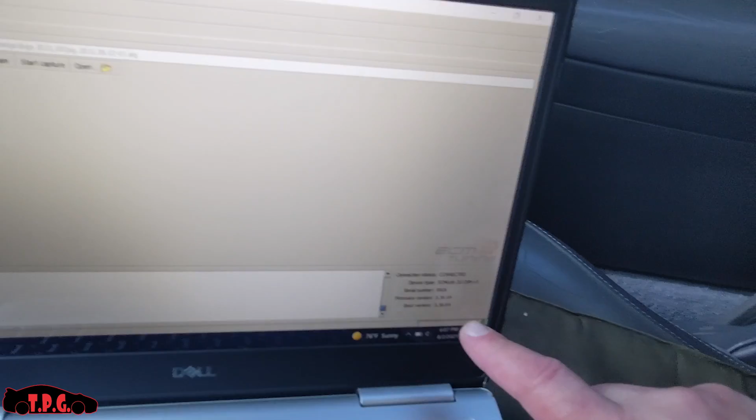Let me get a better angle at this. This is gonna be tough, it's a tiny car and I'm a big guy. Let's go down in here and take a look.

If you look down in the bottom right corner, we are on version 3.36.64, and that's the version you guys want to have installed, which is the latest firmware for ECMLINK.

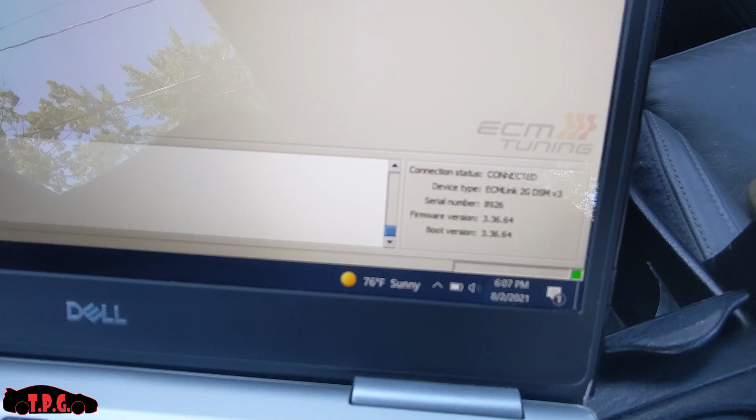Now that we're upgraded, we are going to connect. The first thing you got to do is click the connect button. It's going to run through its little paces down here at the bottom, checking all the sensors that it has, and it's going to say connected. The bottom left says COM7 connected, ECMLINK in 2G DSM V3.

Up at the top, you can start a stream, start a capture, or open a previous data log. When you install ECMLINK, it puts all these file folders in your computer system so you can go back through and access data logs, which is a huge tool.

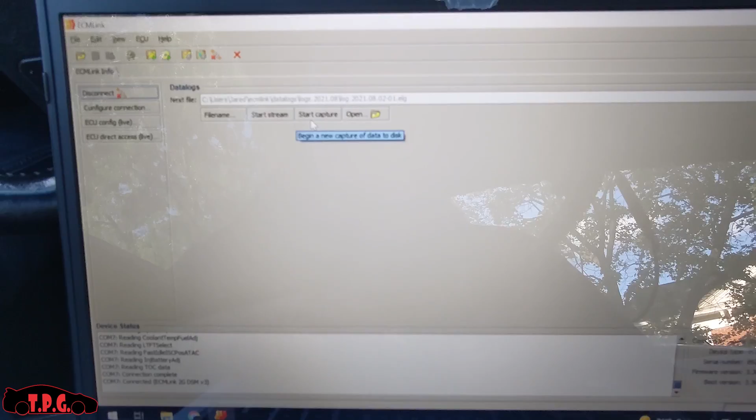The first thing you can do here is click on Start Stream. Stream is just going to show you live data of everything you've put down in your log screen - all the different fuel trims, combined, ISC position, airflow speed, AEM wideband, anything you want to click on and log is on this screen.

So we're going to pretend that we plugged in for the first time and we have different fuel injectors hooked up and we have to get this car started.

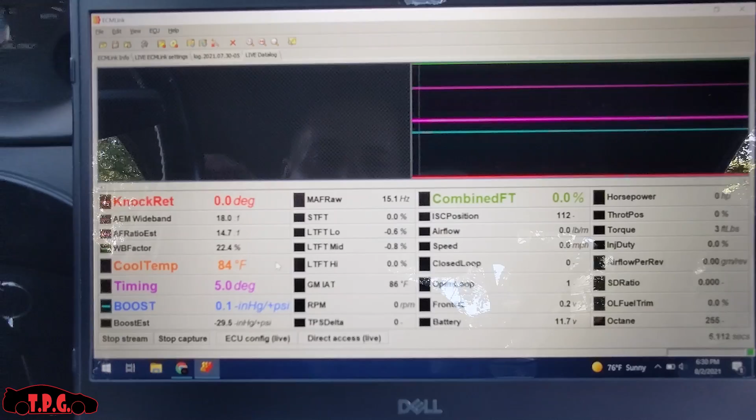Once you've got everything plugged in and your firmware updated, the first thing you're going to want to do is check out your stream. You're going to hop in here and just see what kind of information you have being logged. This is the number one question I get all the time: how do I set up my log screen to look like yours? Well, it's pretty easy - you see all these things at the bottom?

There's two ways you can do it. You can right click on it and come down to displayed values, and everything in this left column here, you can go all the way up and down it - there's about 100 different things you can go through. All you do is click one of them and click add to display, and it's going to bring it from the available values column over to the to be displayed column. Once you do that, it's going to pop up down here at the bottom, and you can get all these different parameters added.

You can go into raw values and get your MAF Hertz raw, which is a very important one if you're a MAF tuning person. If you have a MAF sensor hooked up - GM 3-inch, a stock one, an Evo, a 1G, whatever you got - that's how you do it.

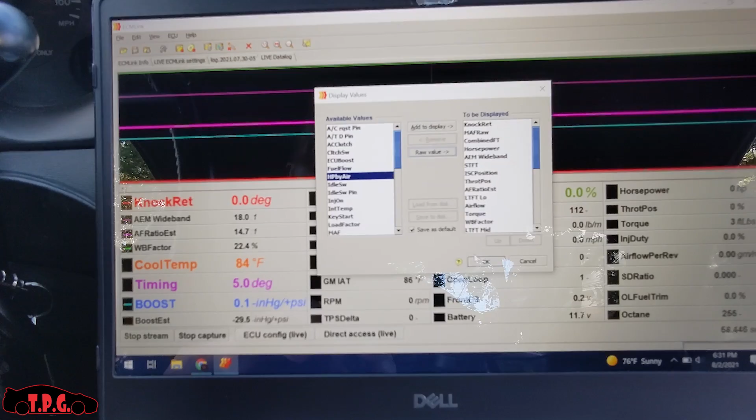Once you're done, you hit OK, and it will pop up on this display right here, and you'll have all these different parameters. You can reorganize them however you'd like. To reorganize them, if you want to stack them on top or have it all across the top line, you have to move it around with the up and down button that are in this pop-up box.

If you want to move the AF ratio estimate all the way to the top, where right here I have knock retard as my number one, I would just click on it and click up a bunch of times till it's all the way at the top.

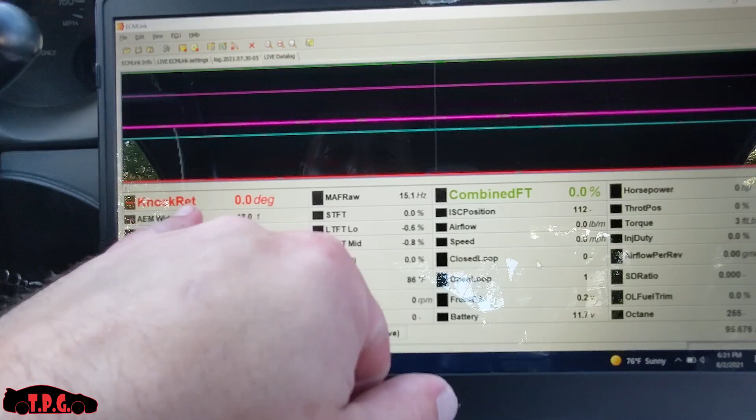Everything is set up in landscape, so each box is numbered: 1, 2, 3, 4, then spot number 5, 6, 7, and 8. So if I want knock retard followed by AEM wideband below it, in that pop-up window I put knock retard as number 1, AEM wideband as number 5, and so on down the list. I have mine stacked vertically—that's just how I like it. If you like it some other way, change it up.

Alright, so you stop your stream. If you don't see what you want in that log screen, go back into ECU Config Live, click on that, and come all the way down to the bottom of the page to ECU Inputs. That tab is where, if you're changing a sensor—like I swapped out my MAP sensor on the manifold and installed my OmniPower 3-bar map sensor in its place so I can log boost—this is where I tell the ECU what sensor I wired and where. I chose the MDP location and clicked on it.

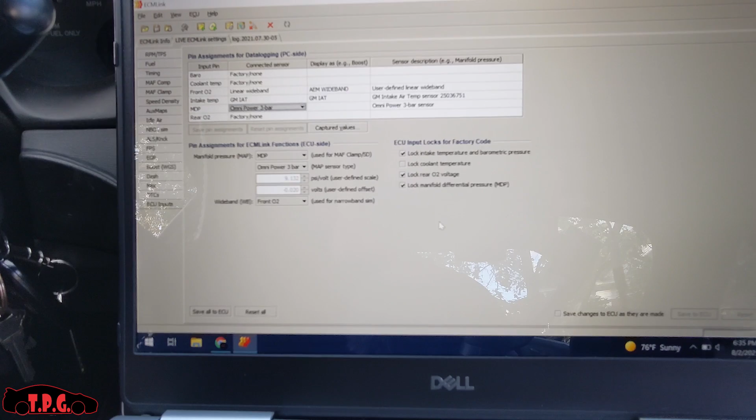A drop-down box popped out, and I chose the OmniPower 3-bar map sensor, went to the bottom right and clicked save, and now my ECU knows that the MAP sensor location is now an OmniPower 3-bar map sensor. So I can run speed density with my GM IAT, which is also installed and wired in. If you guys have the ECMLink breakout harness for the MAF sensor, it works great for wiring in speed density, or you can have both set up like I do. I'm still learning speed density and getting that set up.

So anyways, back to what we were talking about. If there's a value you don't see on your log screen and you want to add it, in the ECU Inputs tab you'll see this box right here that says captured values. You can click on this, and it's similar to your log screen—it'll show a column of everything you can add to your screen and log, and everything already in the system to be logged.

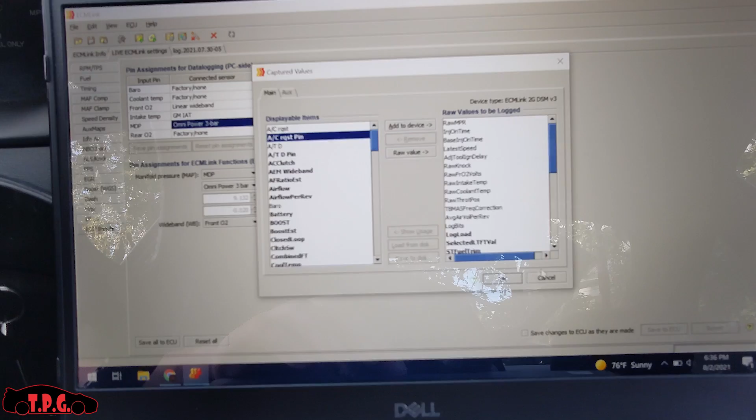You can scroll through this whole list. There's another sub-list of raw values you can go through, and all you have to do is click the device or item, add to device, and hit OK. Once you're done, come back into your log screen, right click on it, click captured values at the bottom of the pop-up, and that new item you added should be in there someplace. You just have to look—it's all in alphabetical order.

Something else really important to remember: during the first start or first capture, the first log that you make, consider that your backup. So anything you mess with from this point on—you already have one started and one stopped log, stream, or capture, whatever you want to call it. You'll have one file saved from initially plugging in and checking out your log screen. That's going to have basically all your information for your ECU.

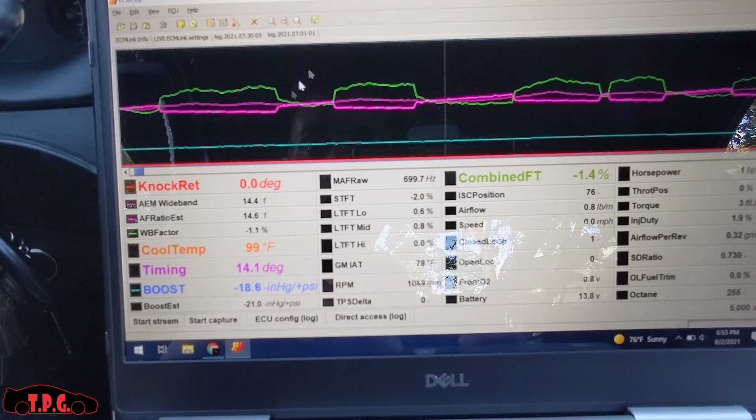If you go in and start messing with anything at all, you can always revert back, because you can come back to this page, go to open, and go to that very first log you made, double click on it, and when it pops open, it has all the information in your ECU before you messed with it any further, saved. So all the stock stuff is saved and you can revert back. There's some stuff on the ECMLink page you can download if you mess with your timing table and want to go back—they have timing tables, fuel maps, a bunch of stuff on there. So I like to have my very first log saved as my first log, so if I ever need to revert back, it's kind of like a restore point in Windows, for lack of better words.

If you mess up something and you don't like it and can't remember what you changed, you can always go right back and save the first log you ever made, so everything's stock, fresh, and unadulterated. Now that we've got that out of the way and know how to set up our log screen, we are going to try to start the car.

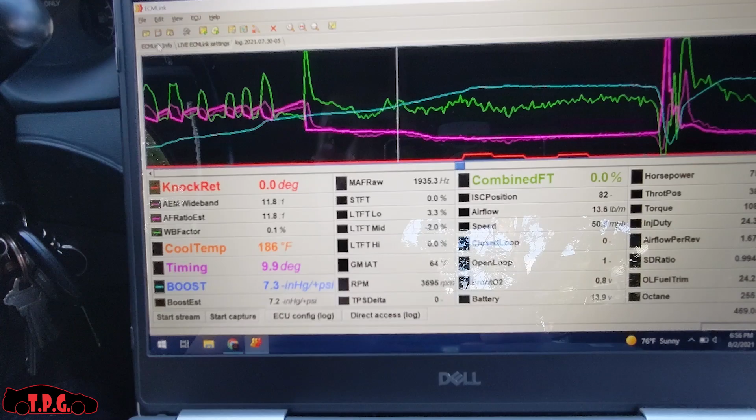In my case, we ended up putting in some 750cc fuel injectors. With those fuel injectors, you can't just swap them out and start your car. That's not going to work, because the ECU thinks it has 450s in it, so it won't give you enough gas, or it'll give you too much, and your car will run like crap if it even starts. It'll stall out and spit and sputter, and it's just a bad time. So we're going to want to get that squared away.

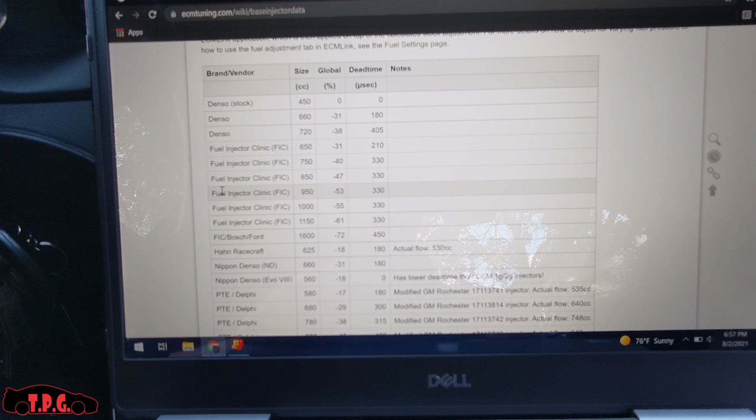First thing you do, before you fire your car up, is connect, put the key in the on position, connect, and go to ECU Config Live. Since we're using 750cc fuel injectors, we're going to jump into the fuel tab. Now you'll see this graph, another plot chart similar to your MAF comp, but we're not going to mess with these sliders at all. Instead, we're going to hop back over to ecmtuning.com/wiki/base injector data. This table is a compilation of a bunch of different injector brands, types, and sizes, and it gives you important information so you can get your car fired up.

Alright, hopefully you guys can still hear me. The car is on now. So we're going to pretend we just started this thing up with a set of 750cc fuel injectors, which, if we go back to our table, are fuel injector clinic 750s. So we had to go change the global to -40 and the dead time to 330, per the ECMLINK wiki.

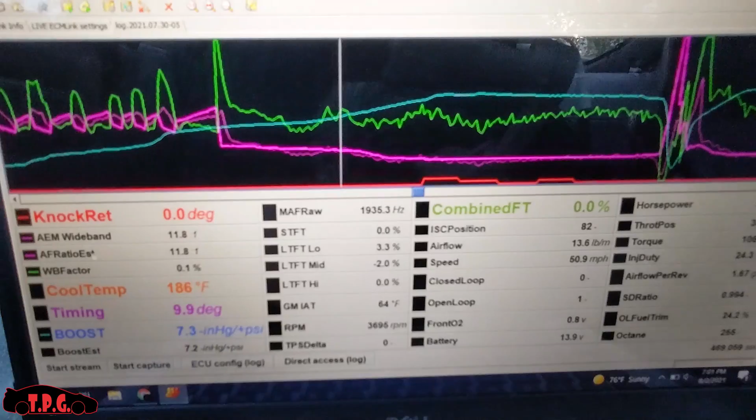That's what the ECMLINK wiki says. If we come over here and take a look, you can see I'm at -40, and it goes to -40.6, which is what ECMLINK automatically put in as the decimal place. I do have a different dead time, a little bit higher than what they suggested. They want 330, and I'm up a little bit. I'll explain that to you.

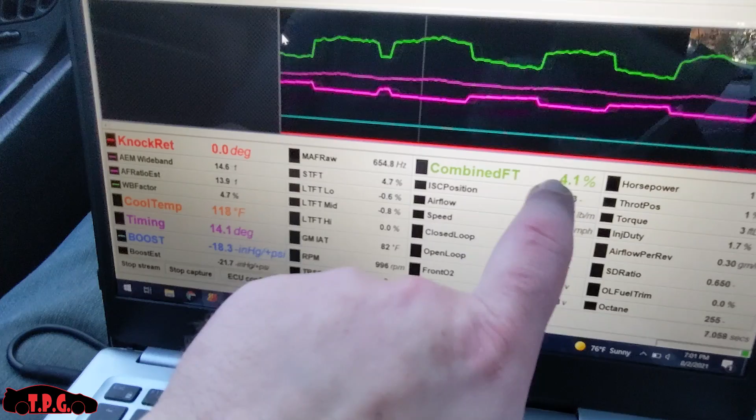We started the car just now, so we're going to start a capture so I can give you guys more information. If you look at this capture data, you'll see we just started and our combined fuel trim is showing lean, 3 to 5%, fluctuating between 3 and 6 actually. We have our LTFT low, LTFT mid, LTFT high, and our short-term fuel trim right here. These are some important numbers you want to log.

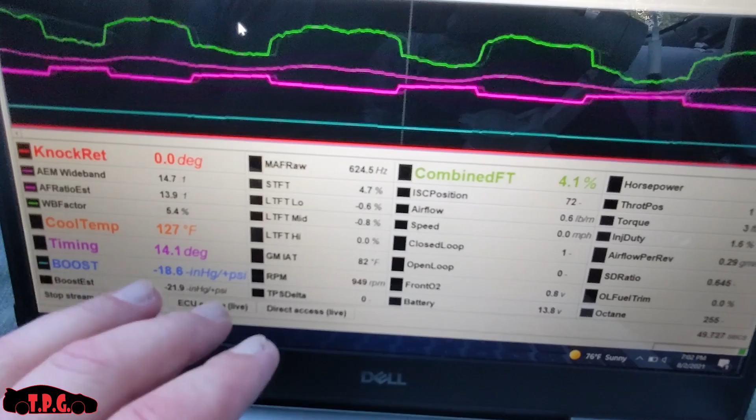When the car is fired up, first thing, we're going to take a look at this number and our wideband factor. These numbers will fluctuate when the car is cold, it's at 124 degrees. Once it gets up to operating temp, the combined fuel trim and wideband factor should settle down a lot. So you don't want to make crazy drastic changes until you get some temp in the car and it levels out. Once it warms up, these numbers will get a lot closer to 0, which you want, and then you can make your adjustments.

But for the sake of argument, let's go ahead and show you. If you start your car and this number's way out, say it's at minus 15%, meaning you're running 15% rich. Well, we log MAF raw so we can see that our idle hertz point, how much airflow is coming in, is in the 6 to 700 range. So our idle point over here in our ECMLINK live settings, if we go back into MAF comp, we know that on this chart the car is idling between 600 and 700 hertz.

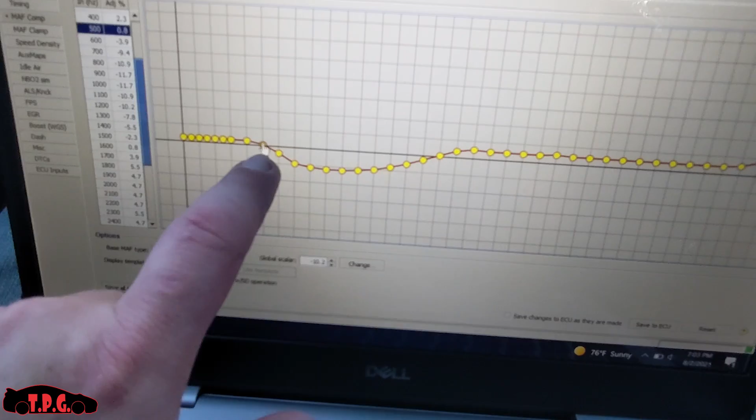That's these two points right here. So if I have a ton of fuel and it's saying I'm 15% rich, it says minus 15% back here, meaning it's pulling 15% of fuel out, I'm running really rich. I'm going to look at MAF raw and see I'm at idle, between 5 and 600 hertz, then go back to my ECMLINK live settings, go to the 500 hertz point, and pull out 15% until I'm right about there, and do the same at 600, then save it.

Now, if this is where I'm idling, 5 and 6, then these other points really don't matter too much, so I would just go over here and bring all the rest of them down so that they're in the same area as my idle, because it's not really going to go any further.

If the car goes into stall, you don't want it really lean. Say you hit the gas funny or shift funny, you don't want the engine RPM to drop so low that when it hits that airflow point, it's either dumping a bunch of fuel and stalls itself out, or it chokes itself out by not giving it enough.

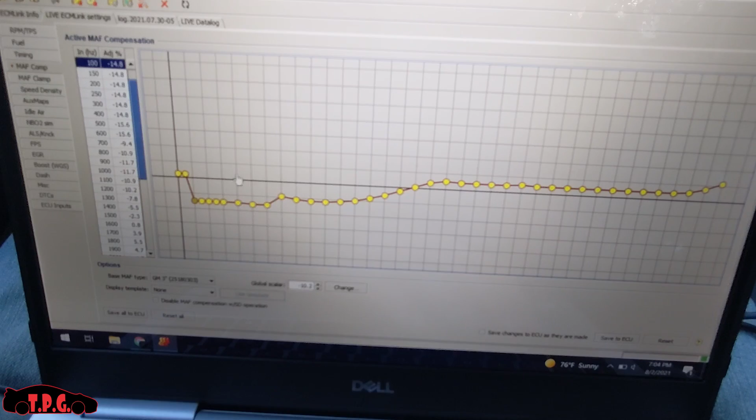So I usually put my idle hertz points and everything below that on the same level. So if I was 15% rich and I moved my 5 and 6 down minus 15, I would bring the other ones below that point down also, and that's going to be the start of my table. So now I have everything below 500 and 600 lined up together.

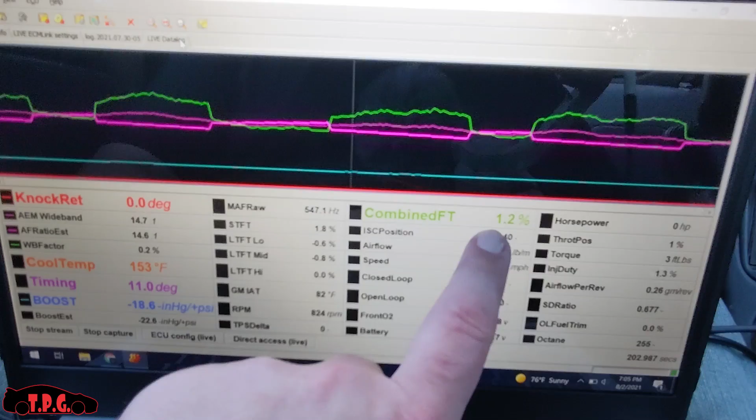Now I'm going to go back in, after I save this, go back over to my data log and take a look and see if this combined fuel trim number has dropped at all. If it's gone from minus 15 to minus 1 or 2 and gotten a little closer to 0, I'll be happy.

Now, in the reverse, if this number here says it's 15% lean, if it doesn't show minus 15, it just shows 15 on here, and my wideband factor is showing 15%, I'm going to come over here and do the opposite.

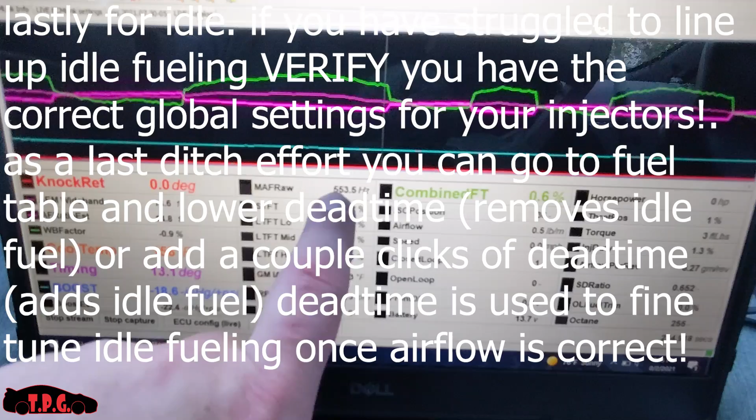I'm going to grab my idle hertz point. It's still the same — if I look at my data log, I'm still between 5 and 600 hertz idle airflow hertz. So I'd go back into my settings, and wherever the 500 and 600 hertz points are, I'd go ahead and add 15%, and then bring everything below 5 and 600 up. So we're going to make those all the same.

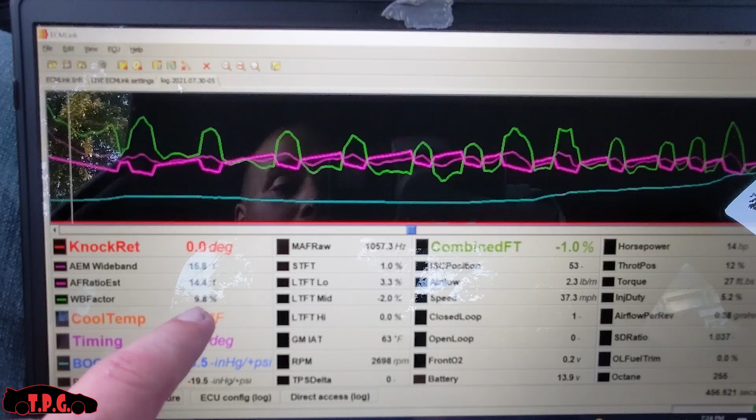So now we've messed around, we've got the car to fire up, we've got our idle hertz figured out, our airflow points are at 5 and 600 hertz with a 3-inch GM MAF sensor. If you're running a stock MAF, it's going to be around 50 hertz, that'll be your idle point, but we figured out how to line up our fuel trims at idle so the car is not saying we're running 15% rich or 15% lean.

And we don't have a huge wideband factor correction, and it's idling and sounds fine. We're going to take it for a light drive around the block — no boost, don't rip on it, I'm talking a grandma drive, part throttle around the block, just to get a log, just to get some information so we can start making changes as needed.

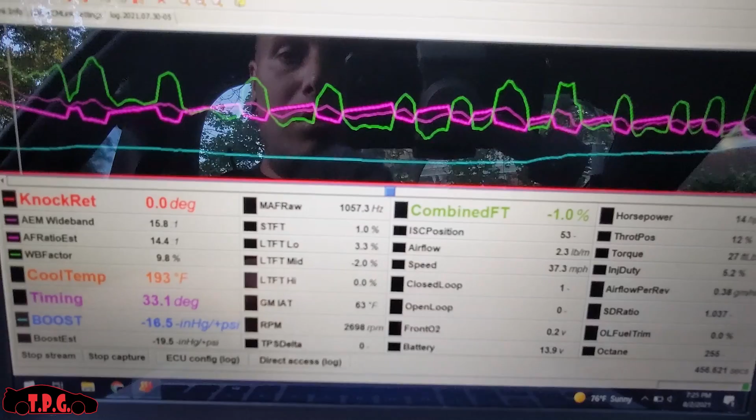So we went around the block and came back, we shut the car off, and we're going to take a look at the data. First thing, we're going to look at our MAF raw point. Right here we are at 1000 hertz, and at that point, which we also know corresponds to our MAF comp table, 1000 hertz is right here, that little dot.

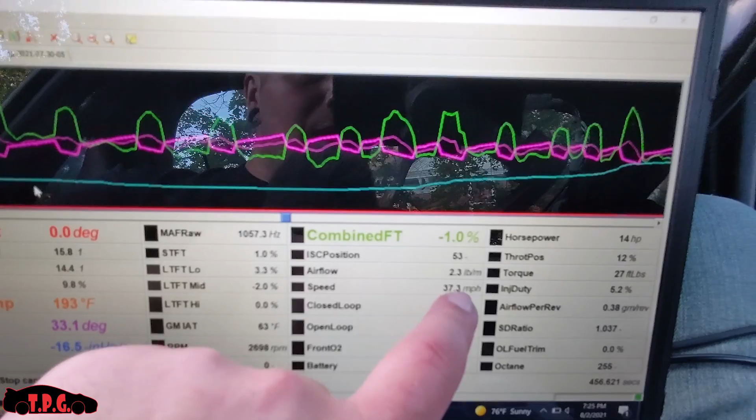Now at that point, ECMLINK, if we look down here at our wideband factor, it says that at 1000 hertz, just driving around at 37 miles an hour with 12% throttle, nice and slow, it's saying that we need 9.8% fuel correction. So what we'll do is go back into our MAF comp setting, and at 1000 we're going to add 9.8%, and we're going to leave it there.

Now we're going to go to the next hertz point, which after 1000 would be 1100. So we're just going to keep going forward until we see an 1100 pop up. Right here's 1100 hertz, and it's saying that we need to add 10% fuel.

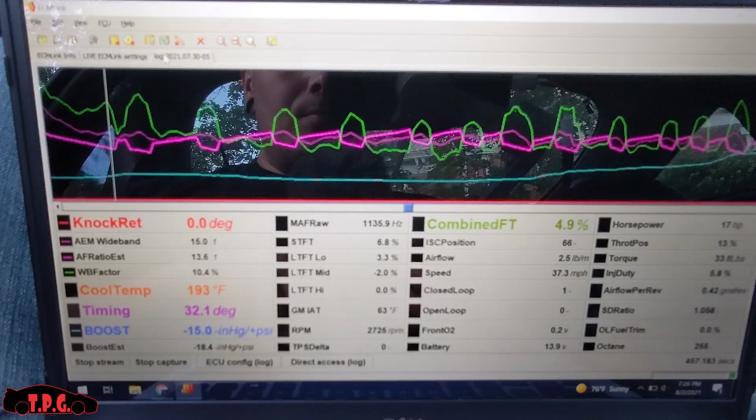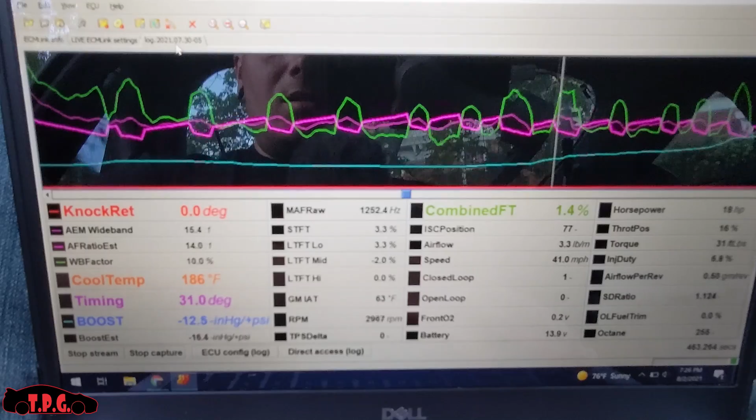So we'll go back into our settings, go to the next point, and add our 10%. We're going to keep doing this all the way through—1000, 1100, 1200, 1300, 1400—and just keep going through the list until we get to the highest hertz point that we just logged. We'll call it 1800 hertz, and we're going to look down at our wideband factor and our combined fuel trim, and try to get these within plus or minus 5%.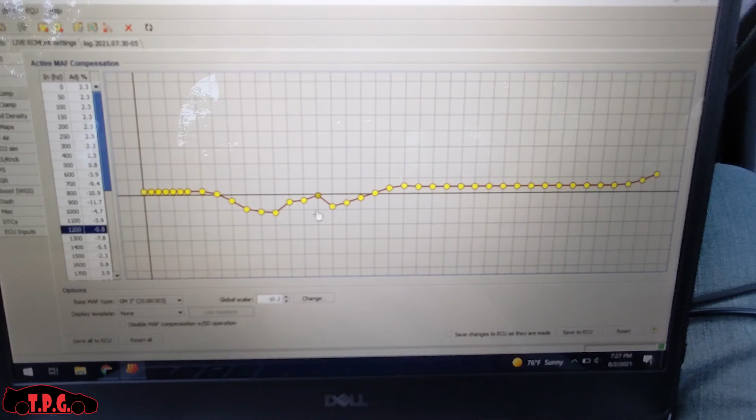So we're going to go back in here and add the couple of percent we need to correct what our wideband factor says. And when we're done, we're going to have a bunch of different points on our graph, and it may look something similar to this.

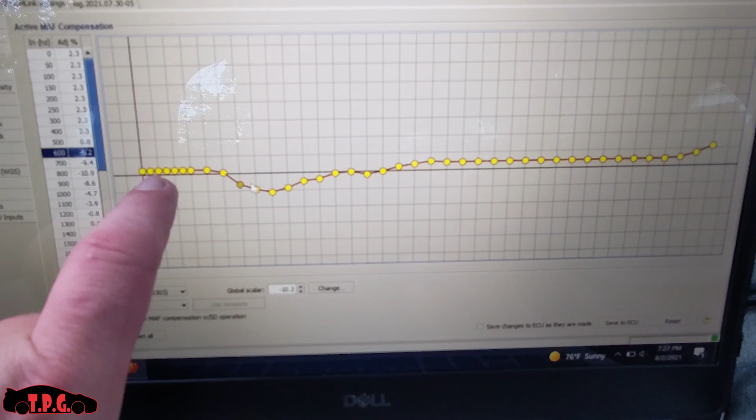If you end up with this wavy, all over the place, somewhat jagged looking graph, you're going to want to go back through and smooth this out just a little bit, because you want this to be a nice, smooth airflow chart. You don't want it going crazy where after your idle is all nice, you've got a point that goes way up like that or way down like this. You want a nice, smooth airflow chart or airflow graph.

So you can go through and tinker with it just a little bit. We're going to lower one right here, drop this one down just a tad, and this one a tad, and raise this one up some, within 1 or 2%. And then we end up with this nice, smooth transition here. Now that's where we're going to save it.

And we're going to go back out again and take another log, keeping an eye on our knock. We're not going to get into a bunch of boost yet. We're going to see if this next log has less correction on our wideband factor at each of these hertz points. So I'm going to check the 1500 hertz point again after I've just made my corrections.

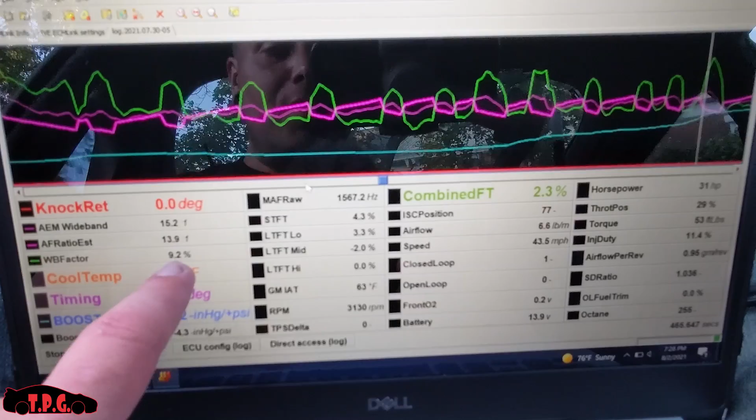I drove around and made another log. I'm going to go check this second log, and look at 1500 hertz. Hopefully I'm seeing closer to 0 or 5%—I want plus or minus 5%.

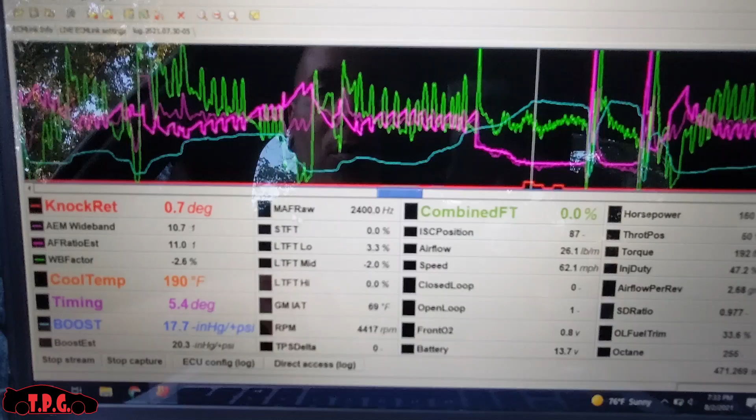One more thing I want to mention. If you're going through the paces, dialing in your airflow calculations and getting everything nice and calibrated for your MAF sensor, and going through the hertz points, and you end up stopping after your light cruise—we'll say in this case we stopped right here at this point. The furthest log I've got is 1800 hertz. I haven't gone higher than that yet, and I haven't gotten into any boost yet. You can see the rest of your graph drops off dramatically and is way down here.

You don't want that, because that's going to be a lean spot. When you raise one of these, you're adding fuel; when you lower one of these, you're taking fuel away. So it's probably not going to be very good for your engine if all this is dialed in all the way up to the 1800 hertz point, and you're driving 45 miles an hour down the road, you hit 5 psi of boost, and then all of a sudden all your fuel disappears for the higher hertz points. You're going to be lean.

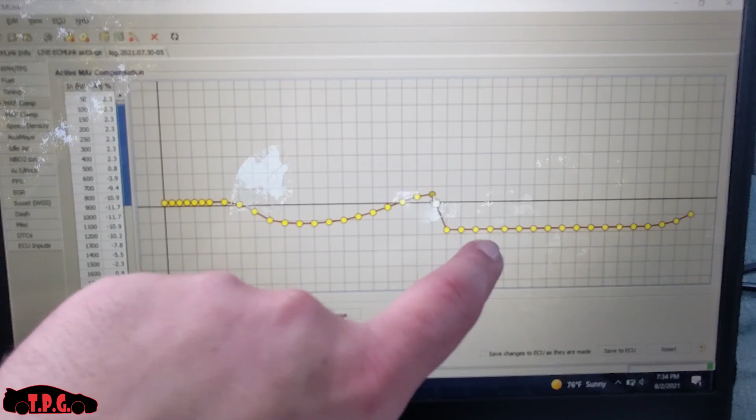You don't want that. So what you're going to want to do, until you get up into these numbers—until you get past 1800 hertz in a log, carefully, obviously you're not going to try to blow anything up—you'll want to go down here, and you can actually highlight all these numbers that are above 1800 hertz. So we can double tap and drag all the way down to the bottom of the graph.

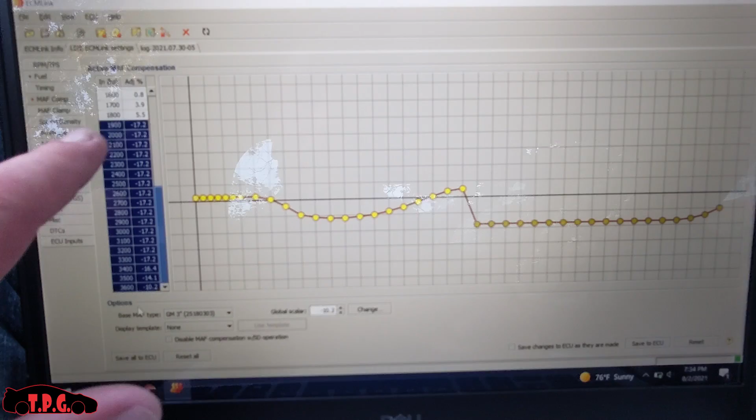So from 1900 to 3600 hertz, hit control then up arrow, and you're going to bring all this up to the 1800 hertz point, and that's where you're going to leave it until you start to log those higher hertz points, 18, 19, 20, 2100 hertz. You're going to want to at least have the same amount of fuel that 1800 hertz likes.

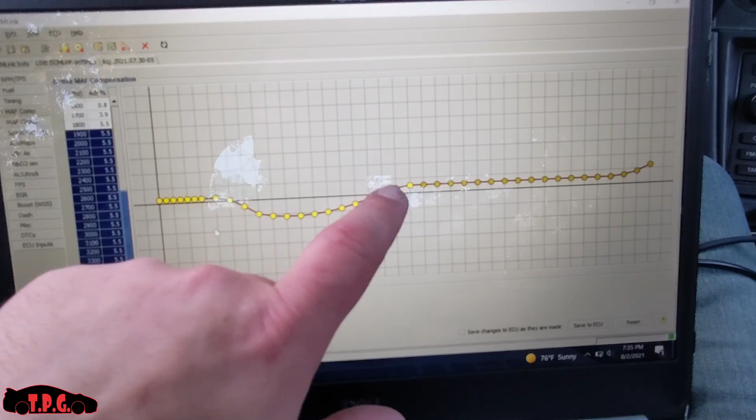So you'll save that to ECU. Then when you go in and do your third log and everything looks good in the lower hertz points, and you're on part throttle cruising and nothing's going nuts, you're not having a whole bunch of correction, you're not getting a bunch of knock, you can start to give it a little bit more throttle and start getting into these medium hertz points, which would be in the lower boost range.

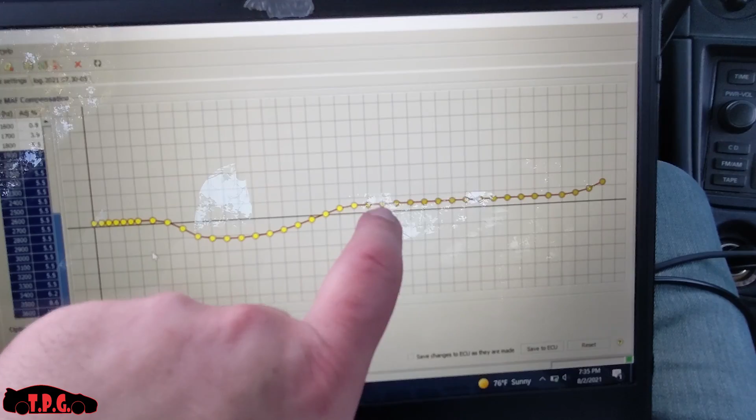If you're running wastegate pressure 12 psi, you can keep an eye on that, and make sure you're not knocking like crazy and add fuel accordingly. Once you get up into 19, 20, 21, 22, 2300 hertz in your logs, you can make the corrections that you need to make like we did in the lower ones and make all the changes to these numbers as necessary. But you don't want to have them really low so it's just a drop off and you lose a bunch of fuel.

So now that you've done your short drives around town and you've gotten up to city limits, you can't go faster than 30, 40 miles an hour, you're going to have to take this bad boy out on the highway and start doing some more tuning at some higher speeds.

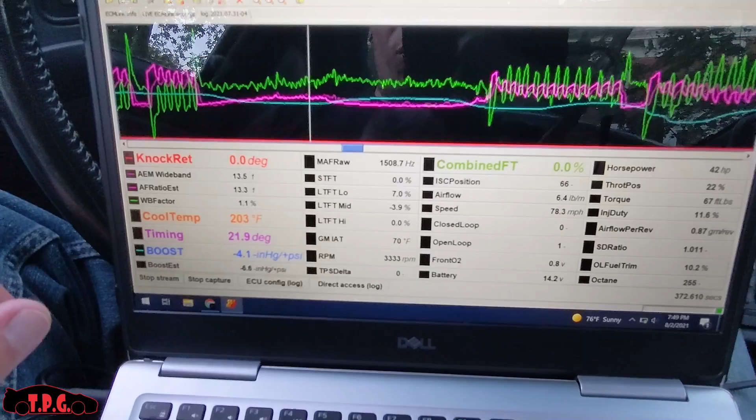So we're not going to get into a bunch of boost yet. Let me close that out. We're just going to go jump on our local highway or county road and take it up to 50 to 70 miles an hour. Be gentle. Don't go ripping through the gears. Don't hit a bunch of boost yet. Hopefully you have your boost turned down. And you're going to try to stay out of boost and just go jump on the highway.

What you're going to look for is that you have no knock, you have little to no correction, and your wideband factor is right around plus or minus 5%. In this case, we're driving down the highway and we're doing 77 miles an hour, going with a 0% correction, and we're only off 0.6%.

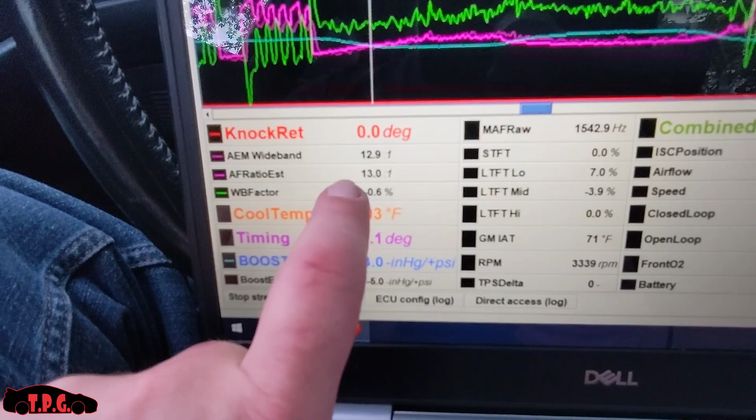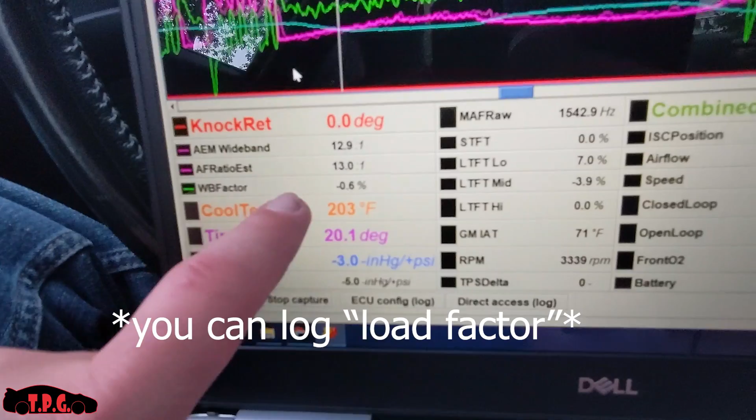So AF ratio estimate is the number that is pulled from your direct access table. If you are curious where this number comes from, this is the number that the ECU has programmed into it, off your fuel table in direct access. So at this point of the RPM band at 3,300 RPMs at the load factor we're at, which is a loggable value, you can log load factor, it says that it should be at 13.0 to 1 AFR, and you're just on the edge of it.

Things are good, so you're going to do a log. You're going to make sure that your wideband and your air-fuel ratio estimates are overlapping on your graph. That's what you want. Keep an eye on your wideband factor. Drive it around down the highway. Put a little bit of load on the car, and make sure that your numbers line up.

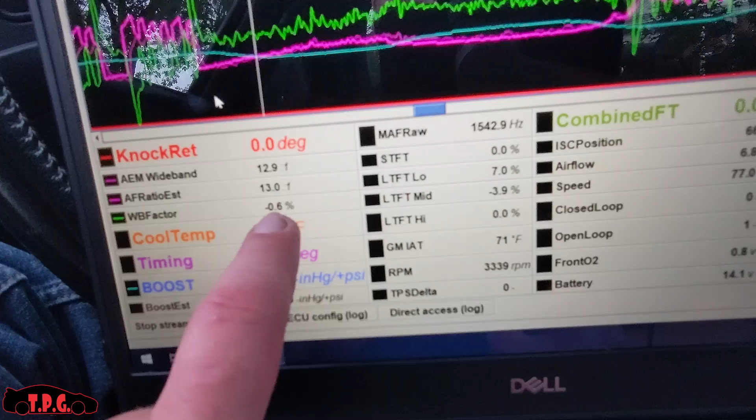So if they don't, you're going to do the same thing that you did before to correct your idle. You're going to figure out what hertz point you're at, what correction wideband factor says, and you're going to go into your MAF comp table and make adjustments accordingly.

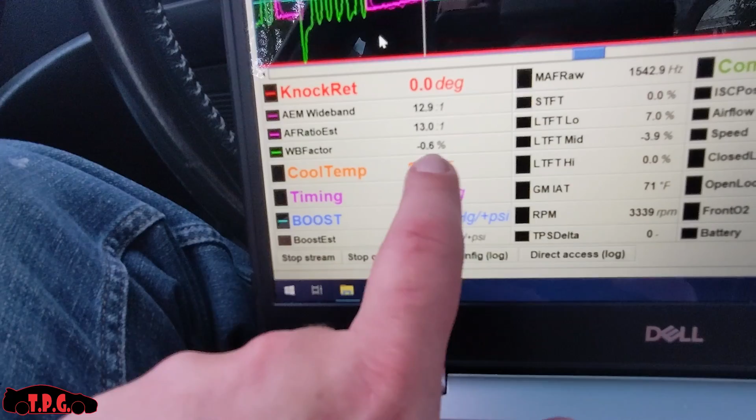So right here at 1500 hertz going with wideband factor, it says we're at minus 0.6, so it's taking away 0.6% of the fuel at that hertz, which is good. We're within plus or minus 5%, so we're going to leave it there.

Okay, we got her fired back up. Now you've done your log one, you got your idle set up, you did a second log driving around town, dialing in your fuel, you did it again, got the higher hertz points figured all out, and you went for a nice highway drive, and you're all dialed in, and things are good.

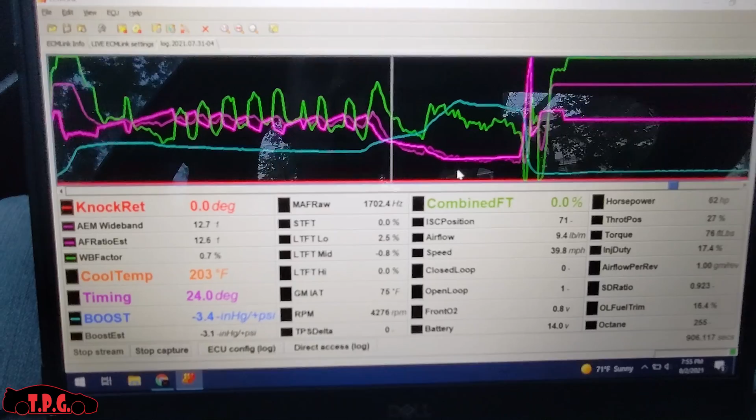Your fueling looks correct, you're not way off anywhere, so now you can start creeping into a little bit of boost and just doing some light pulls. And you're going to keep an eye on your logs, and make sure that your lines are close to overlapping with your air-fuel ratio estimates and your wideband. You want them to be right over top of each other in the logs.

So this blue line is boost. My red line on the bottom that's flat is knock. We have 0 degrees of knock.

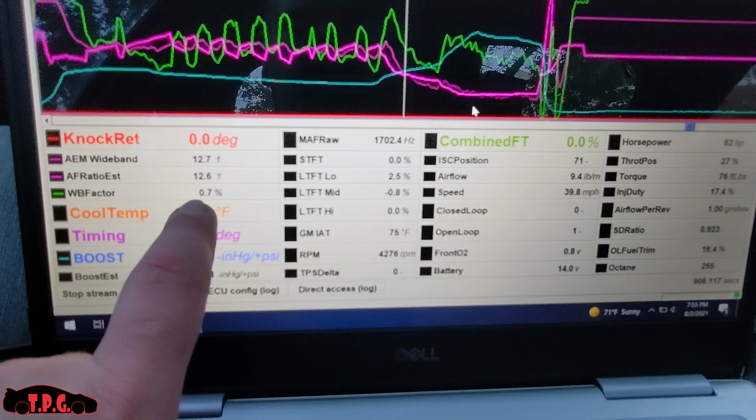We're a little bit lean right here on this point, 0.7%, and I don't have any correction. Things are looking okay, so in this case I went out and did a little pull.

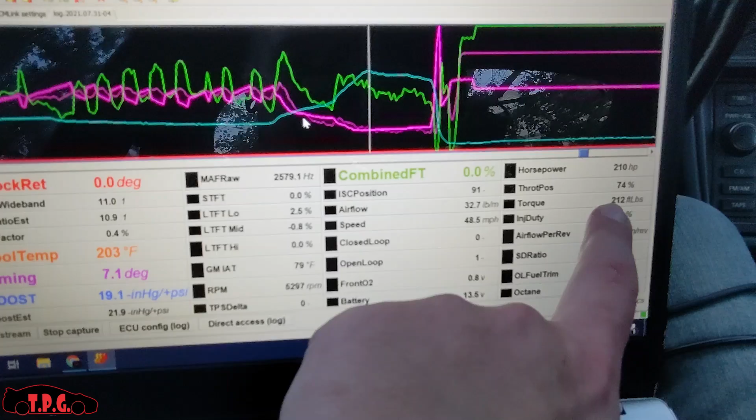You can see in the bottom left here it'll show us boost. We went up to 19, looks like 19.1 pounds. At 19.1 psi we didn't get any knock. We were at 74% throttle, so we weren't quite maxed out, but everything looks okay.

No knock. The AFR is 0.1% off, which is fine. We don't have a crazy wideband factor correction going on. We're not overheating. We didn't have a whole lot of timing there, but the main thing is we don't have knock, and we don't have a lot of correction here.

So as you continue to go on and dial things in, you're going to get your hertz points all figured out. This is 2,579 hertz.

So in ECMLINK under MAF comp, we're way up here at this point in our chart. We're at the 2,500 hertz point. You can see that going from 18 to 25, there's not a whole lot of correction going on here.

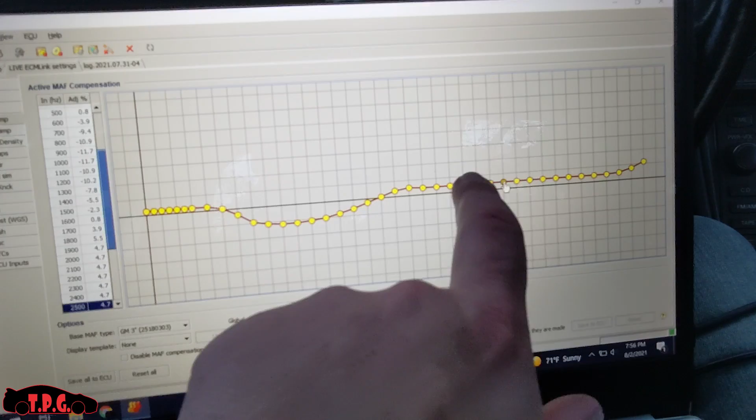I didn't have to change a lot of stuff. It's relatively smooth, and that's a good thing. I'm obviously going to have to continue to tune this and mess around and dial these numbers in as perfectly as possible. And then we have a nice calibrated MAF sensor, we have correct fueling, and you're having a little bit of fun in your car finally.

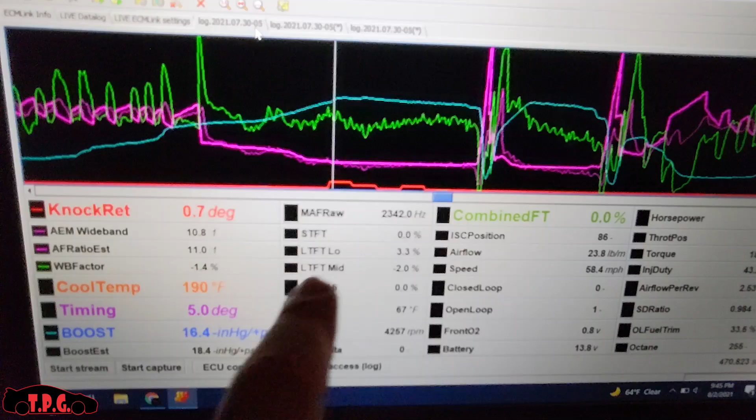There's something else I wanted to touch on before we wrap this up. You can see right here, for example, we have 0.7 degrees knock. So say your graph looks like this and you have correct fuel and your airflow is all dialed in perfectly and you still can't get rid of the knock. This is a small amount of knock, 0.4, 0.7. Anything under a degree is pretty small in my opinion, but you always want to tune for zero.

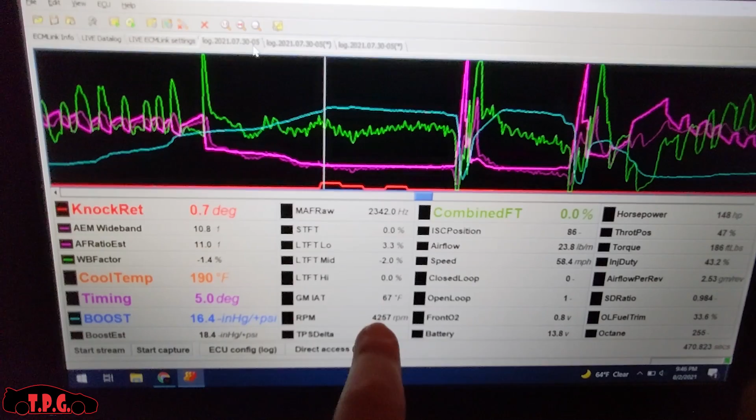So if something like this is still hanging on and you can't get rid of it, or say you get a crazy amount of knock, like 5 degrees of knock right at this point at 4,200 RPMs, you're getting that at 15 pounds of boost, well chances are you might be running too much timing. Here we're only at 5 degrees timing advance in the beginning of this part, but maybe you're running 18 degrees, and you have to figure out where exactly to take some timing out.

There are two different ways you can do this. Again, if your fuel curves are nice, you don't have a bunch of correction on your wideband factor, and your combined fuel trims are all nice, you can go in and remove a degree of timing. The first way to do this doesn't involve you shutting the car down and going into direct access, finding the cells and all that.

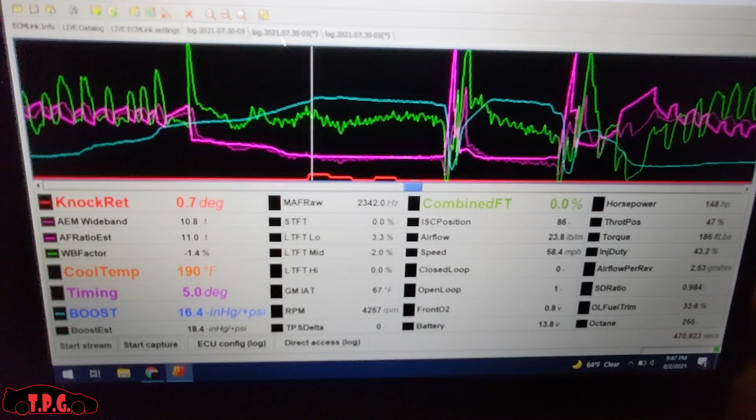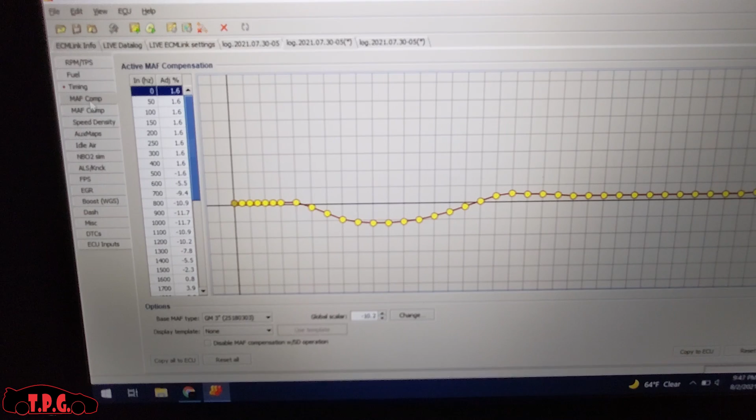You can actually use this first method if you want to just change it on the fly and see if it fixes your problem. If so, then later you can go in and change your direct access logs. So you can come over to the timing table, which is underneath the fuel and just above MAF comp, and you'll see the same style graph we had in MAF comp earlier, this graph right here. It's something similar, but this is for timing, showing you all the different RPMs from 2,000 all the way up to 10,000.

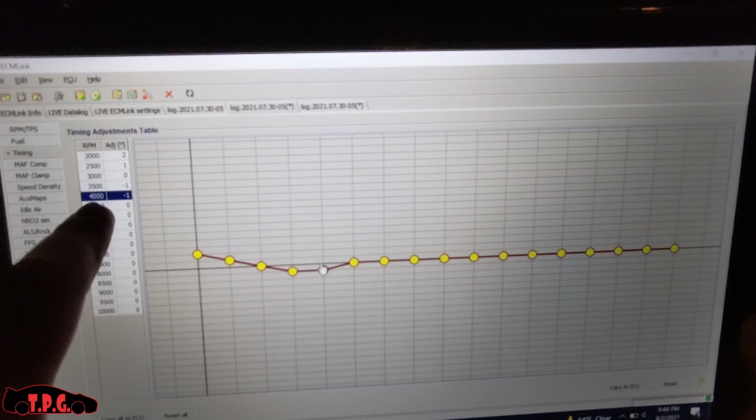So what you have to do is figure out in your log at what RPM you're getting knock. In this case it's at 4,200 RPMs, we're getting 0.7 degrees. So if we want to try and remedy this real quick, we can come into the 4,000 RPM slider, which it highlights here, this point right here. And if you hit Control and the down arrow, you're going to remove 1 degree of timing from the entire 4,000 RPM range. I'll show you what I mean by entire.

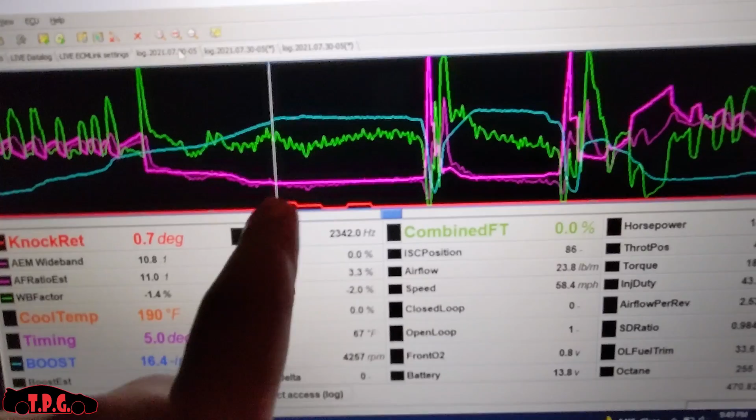And that works for every single one of these rows here in this table under timing, under Live ECMLink settings. So if you want to see if you can remove this 1 degree of timing from 4,200 RPMs or 4,000 RPMs, you come in here, click 4,000, hit Control and the down arrow, or you can just click and drag it wherever you want.

So we just removed a degree of timing from the whole 4,000 RPM band. Now we're going to go for a drive, and if the knock is gone, we know that pulling a degree out fixes it. So next time you're sitting around and you want to mess with it and get really in depth, this is a solution right here.

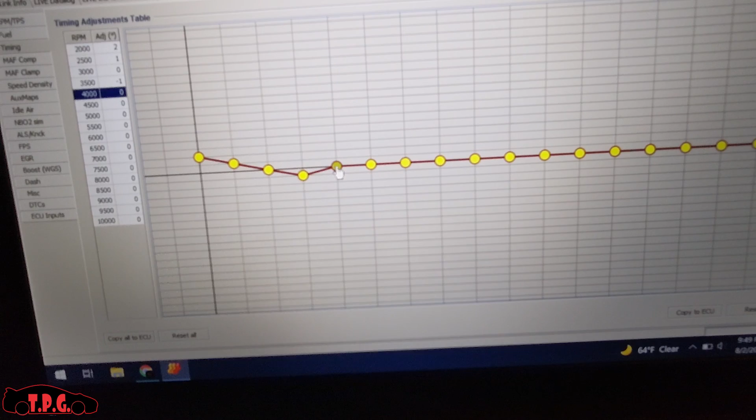But if you want to fine tune it, you can add that degree back. You can go back into your log and open up the direct access timing table, click track data log in the top right, detach the table, and then in the top left click always on top, shrink this down a little bit so we can work with it, and we're going to keep it in the middle of the 4,000 area in the center of the screen.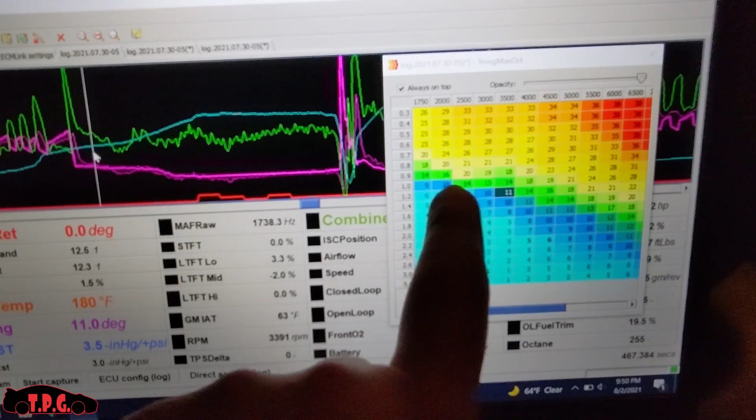We're going to go back over to our log, and if you click in the beginning of this little pull here, you'll see that this number is going to change as the RPMs and the load changes. It should drop down and move around, and that's where it's pulling its timing figure from. So the number you see down here should be the same as the number you see right here, unless you get knock, which once we scroll the log forward, you see how the numbers are changing.

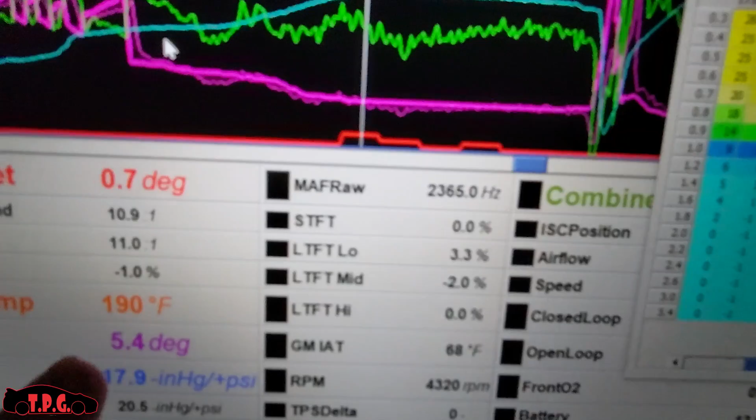Right here, it says we should be at 6 degrees of timing advance. But because we have 0.7 degrees of knock, we're only getting 5.4 degrees of timing advance. So here's where you can fine tune.

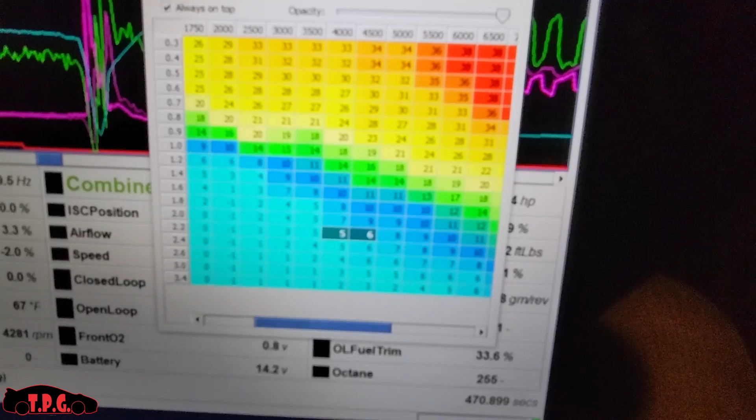If this point right here in this graph is where that knock starts, you can remove 1 from that cell by hitting control. We go to the spot where the knock starts, come back down here, click on this number 5 and hit control down, and then go to the cell next to it and hit control down. It will take 1 degree out.

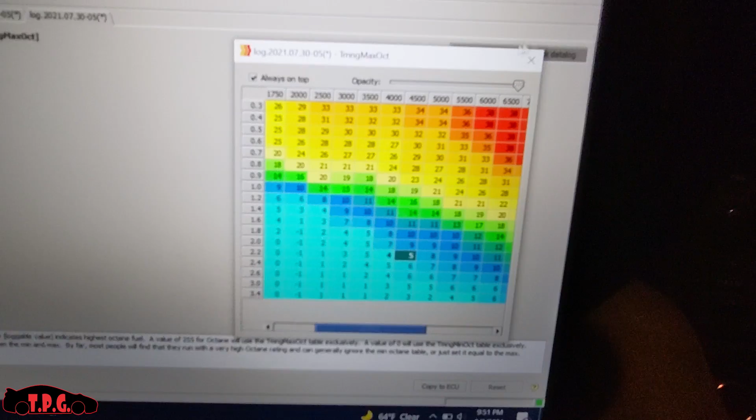Now you can flash this table back to the ECU, and if you build your table and need to do that, all you have to do is go back here, and under the direct access tab where you had the table detached, click detach table again, and you can see these darker cells. Let me move this out of the way. You can see all these are the same font except for that one right there.

4 and 5 degrees are a little bit more bold than the rest because they've been changed and haven't been saved. So now with the key on, engine off, you can hit copy all to ECU. You'll see your check engine light flash a few times, and this new table with that degree taken out at 4,000 and 5,000 RPMs, or 4,000 and 4,500 RPMs, will be flashed into the ECU, and now that should take away that knock that you were having.

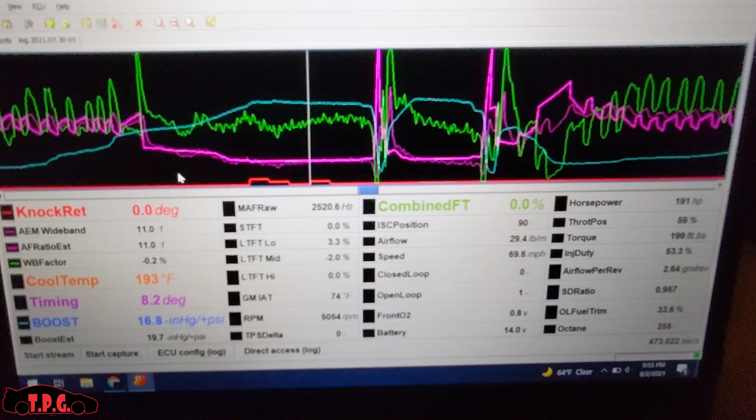There are definitely more people that are well versed with this program compared to myself. I'm still new at this and still learning, but this thing seems to be running okay, and hopefully this helps you guys get your cars set up and gets them running okay as well. Maybe now you know a little bit more what to look for.

If you set up your log screen so you can see this important information like the knock, your wideband is a must, your AFR ratio estimate. You want to see your wideband factor, your timing, your MAF raw, and your combined fuel trim. Those are some big ones that you definitely want to be logging for.

Hopefully this has helped you a little bit. Hopefully you can get your new injectors, or even the injectors that are just in the car that you bought, dialed back in and get your MAF calibrated.

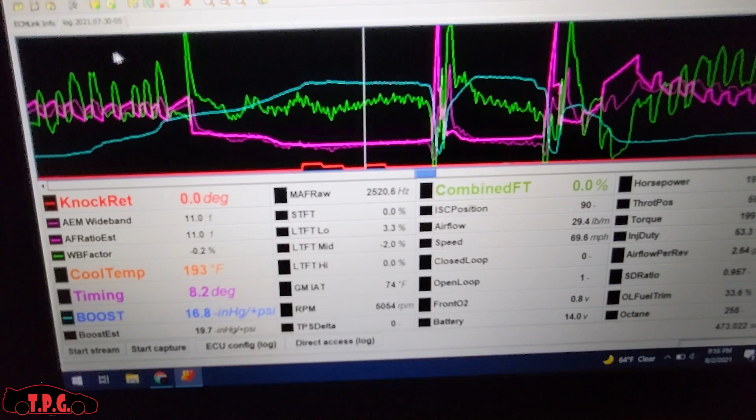I think we're going to continue this little mini series here and start doing some more information on speed density, and how to set up the speed density table, how to dial in your VE and switch over to speed density using a map sensor and an intake air temperature sensor, getting rid of the MAF altogether. I'm almost there, getting there slowly but surely.

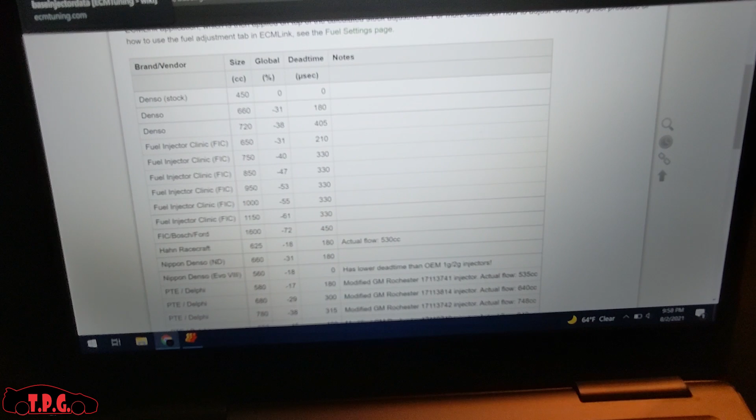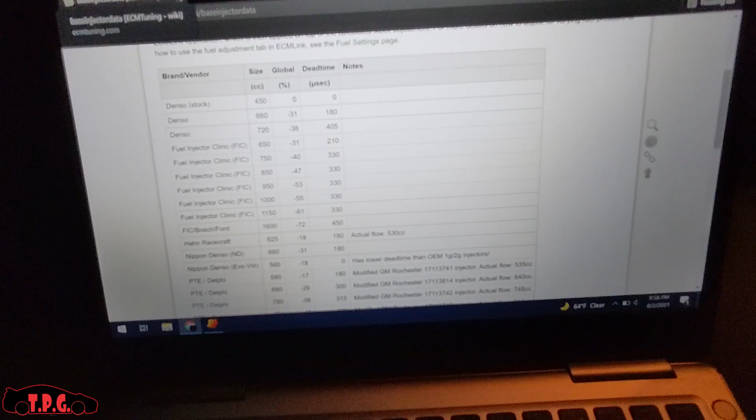So if there's anything else that you guys would like me to cover or try to cover in ECMLINK, drop a comment below. If there's something that I did wrong that you know is wrong and you know the right way of doing it, let me know. I would love to learn more about this program. This is simply me showing what I've learned to you, and hopefully it helps you guys out in some way.

I'm not 100% sure if everything I say on this is correct, but from what I can gather from all the reading and all the videos I've watched, some of this stuff makes a lot of sense, and I'm hoping that you guys get it too.

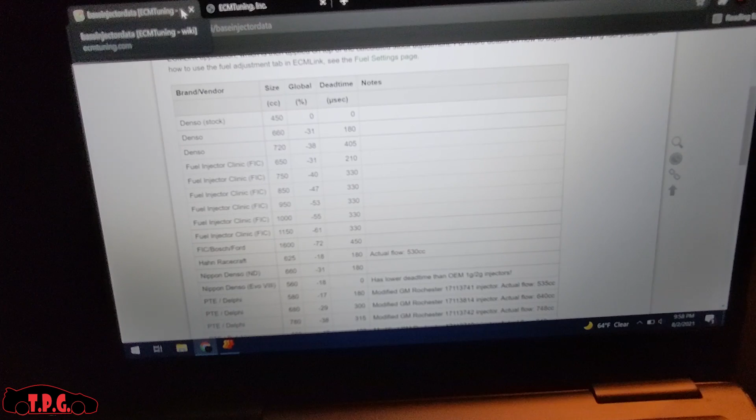So don't be too scared to have some fun with your vehicles. Always be careful when you're going out ripping on it for the first time. Definitely keep an eye on your knock. Definitely go under the dash tab and turn that knock CEL at 2, so if you get 2 degrees of knock, your check engine light flashes at you and warns you. That'll save a motor and save a piston or whatever it could save. It's better than having to spend $5,000 on rebuilding a motor.

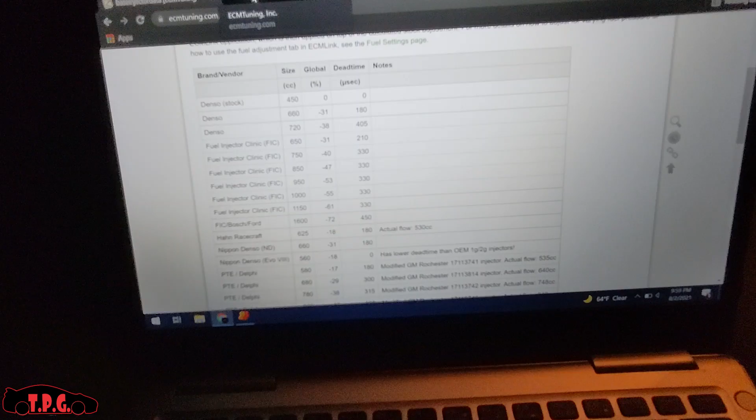So anyways guys, I really hope this helps those of you who are looking forward to getting a more in-depth explanation for some of this stuff. And keep logging. If you have any other questions or want me to cover something else, drop it down below.